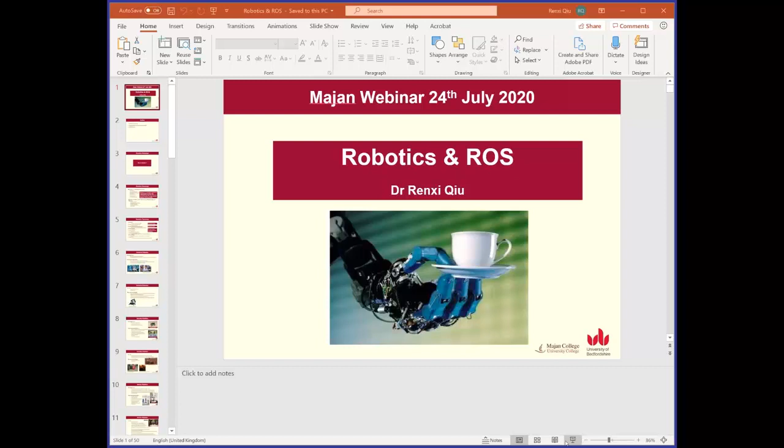Okay, thank you very much. It's my pleasure to make this presentation on robotics for the webinar in Majan. My name is Renxi, I come from University of Bedfordshire, UK. Today I'm going to talk about the topic of robotics.

I will cover 3 topics in this talk. I will start with robotics nowadays, then briefly talk about building robotic applications with the robot operating system called ROS, and finally I will go through a project we had before, building robot assistants using ROS. So that's the outline for our talk today.

Starting with robotics nowadays: the word 'robotics' initially came from Asimov's science fiction book called Liar. In that book, a robot tries to please his owner by lying to people. At the same time, the robot has difficulties maintaining consistency in his own knowledge because he's lying all the time. Eventually, the robot malfunctions. So that's the first time the term 'robotics' was used in history.

To define what robotics is and to cover the concept of robotics nowadays is not very easy, because robotics is a multidisciplinary field. It comes from mechanics, physics, automation, electronics, computer science, cybernetics, and AI. We use concepts resulting from all these fields, but we are different from them. We are trying to unify two different cultures, namely engineering and science. By combining these two cultures together, we are trying to explore things like autonomy, learning, consciousness, free will, decision-making, freedom, emotion, and many other things.

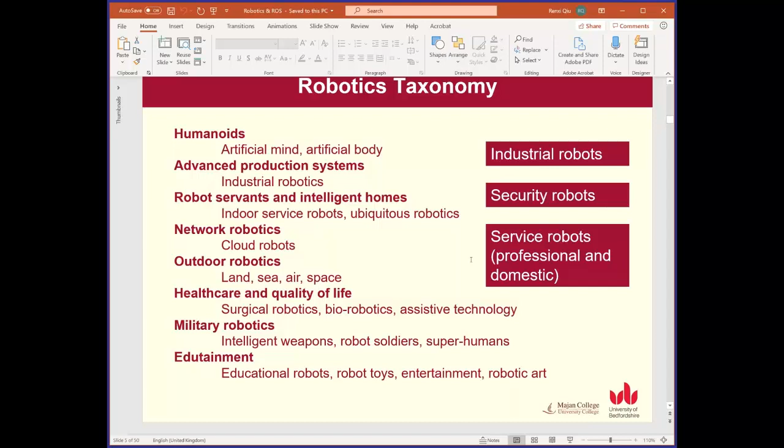Among so many different applications of robotics, I will pick 3 key applications: industry robots, security robots, and service robots. With these 3 kinds of robot applications, we try to understand what problem we are actually solving, and what the difference is between robotics and, let's say, automation. I'll start with the first one, which is industry robotics.

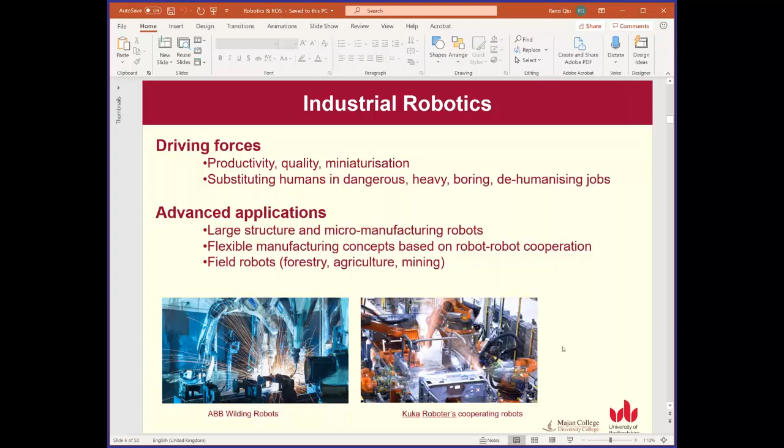The driving force of industry robotics is helping us make better production, replacing humans in dangerous, heavy, or boring environments. With industry robotics, you have many different applications. In the diagram here, you can see the ABB welding robots, which help make the panels. On the right-hand side, we have the KUKA robot arm, used in the car manufacturing plant. For most of these industry applications, you have your industry workspace, and the robot is there to perform difficult tasks which are not easy for humans.

For the issue we face with industry robotics, we need to do research on adaptation and configuration. Even though the environment is not changing a lot, we still need to adjust the robot to handle the task and optimize our applications.

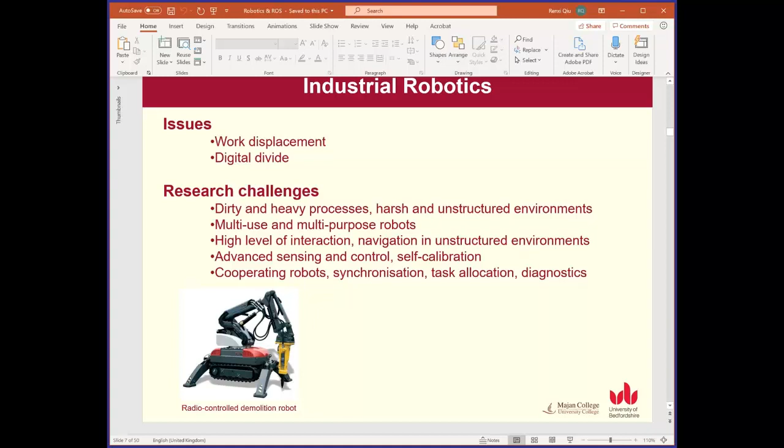Industry robotics are the most well-deployed robotic applications nowadays, and they're producing a lot of real-world applications for us. Moving on from the workspace of industry process, we move to the next one, which is security robotics.

For security robotics, we are mainly working in outdoor environments, so we don't have the luxury of predefined workspaces. You've got a lot of unstructured environment, you're not predicting all objects around the robot, and the robot needs to perceive and understand the environment.

On the right-hand side, you can see this is a Summit robot. We use them for remote assistance and civilian purposes. On the bottom right side, you have the robot called Spot, from Boston Dynamics. In Singapore, they use this robot to deploy in the park — if someone is not wearing his face mask, the robot will give notification directly to the human.

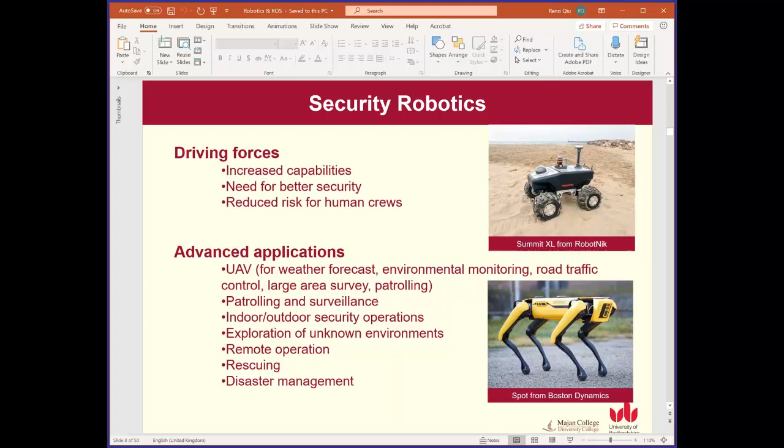In these slides, we see that for security robots, the main challenge we are facing is situation awareness. This is understandable because we are working in a more challenging environment — we cannot fully define the environment like the industry robot.

So that's the second category of robots I wanted to show you. The third category of robot I want to show you is service robots. We're moving from outdoor to indoor — the robot is working with humans in the indoor environment, helping us improve our quality of life.

Compared to rescue robots working outdoors, it's actually getting even more challenging now because the indoor environment is not only unstructured but also has lots of dynamics. You have to work with safety — you must not damage anything in the environment, and you need to ensure the robot is able to keep the surrounding environment safe, not to hurt humans.

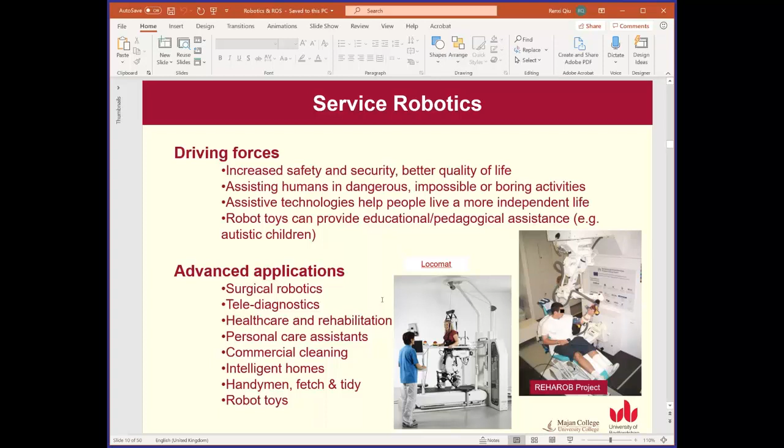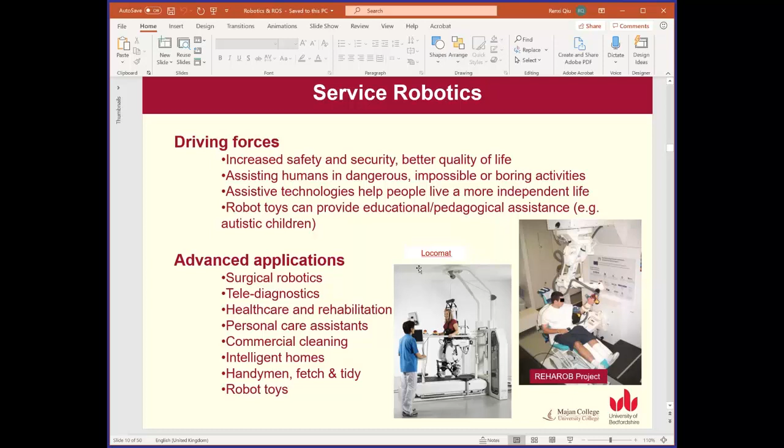The main issue, as I mentioned, is about autonomy and safety. Robots need to be clever enough to handle different kinds of situations, plan for themselves, and maintain consistent performance in unpredicted environments. So that's three kinds of robotic systems we normally face in real life.

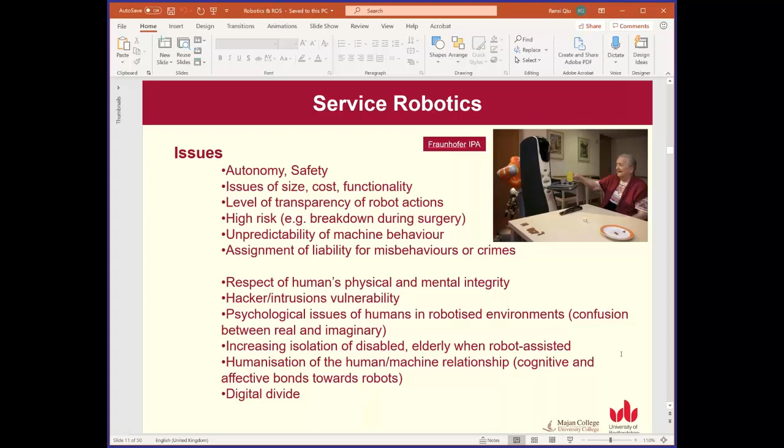For service robotics, there are many different kinds of challenges. We need to deal with complexity and improve machine learning to handle unexpected situations, and optimize the sensors, especially in unexpected situations.

Coming back to my question: what is robotics? Compared to automation, what is different? You can see from the line of examples we've presented so far that robotics is about handling unexpected situations. We're trying to build intelligent machines that make their own decisions in different kinds of unstructured and dynamic environments, from industry processes to rescue outdoor environments to indoor environments with humans.

More and more challenges will be faced by robotics. It requires different disciplines to work together, from computer science to engineering, even from psychology to human science, to deliver optimized solutions with human beings.

To build robotic applications, we have something called ROS. ROS stands for Robot Operating System. This is a universally accepted programming environment for developing robotic applications.

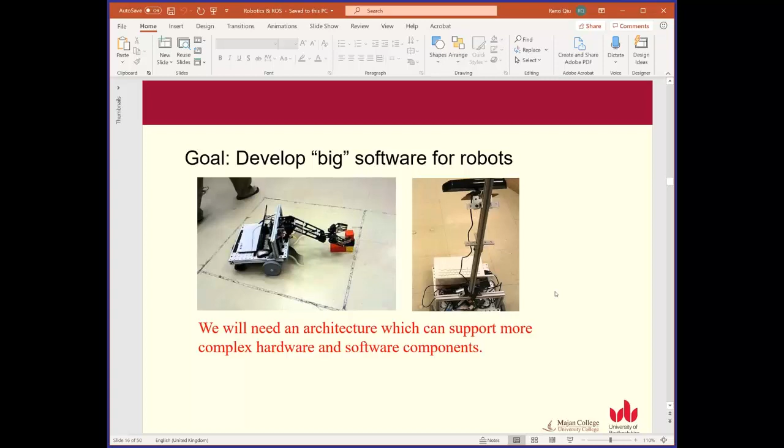So this is my applications in the lab. What we want to do is have some kind of big software which can, using very simple platforms, test our application scenarios and then redeploy them into complicated hardware on a real robot. We want some kind of architecture to support building this kind of complicated hardware from simple platforms.

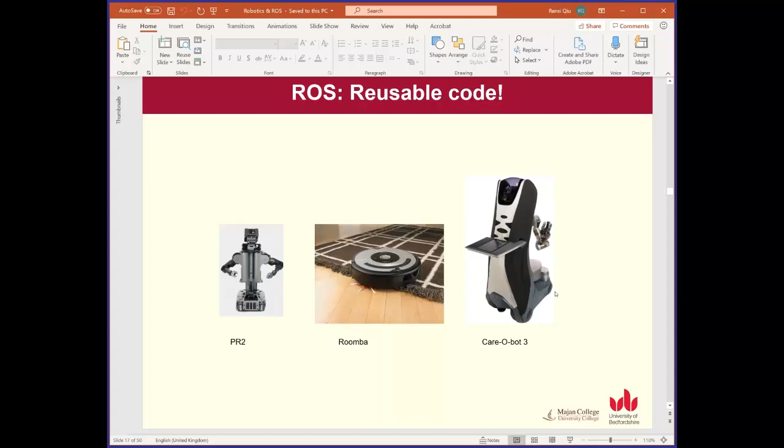For ROS, the objective is the same as software engineering: it's about reusable code. For a simple platform we develop early on, we can redeploy it into different kinds of robots, whether it's a Care-O-bot, a small Roomba, or a PR2. They share similar kinds of architectures, similar kinds of controllers, and similar kinds of software logic that we can implement in our laboratory first.

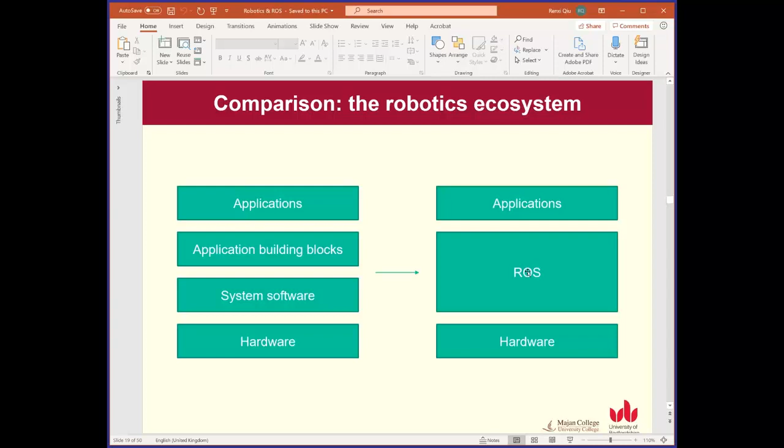The same approach will be applied to the robotic ecosystem. What we do is integrate the application building blocks and system software together into ROS, and then we have the hardware and our applications glued together with the robot operating system.

It's kind of like a meta operating system. ROS is open source. It runs mainly on Linux, especially Ubuntu. It can run on Windows, but that's not optimized yet. It is agent-based, with distributed message passing, just like a normal distributed system. We support publish-subscribe, and we have different kinds of services using remote method invocation. Finally, different programming languages are supported for robot development using ROS. Whether you're a C++ person, you like Python, or you prefer Java, they will all be integrated together into robot development.

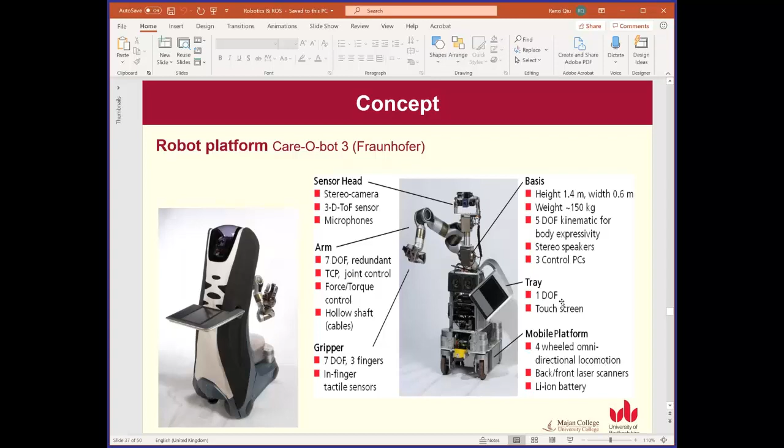We have different scenarios designed for the robot, including fetch and carry, emergency assistance, and retrieving difficult objects for elderly people if they are too high, too low, or too heavy. The robot will be used by family members, elderly people, and professional tele-assistants.

Finally, we have a professional teleoperator interface. This is for professional carers to control the robot and help the user. What we did in this project is design a high-level control framework based on ROS.

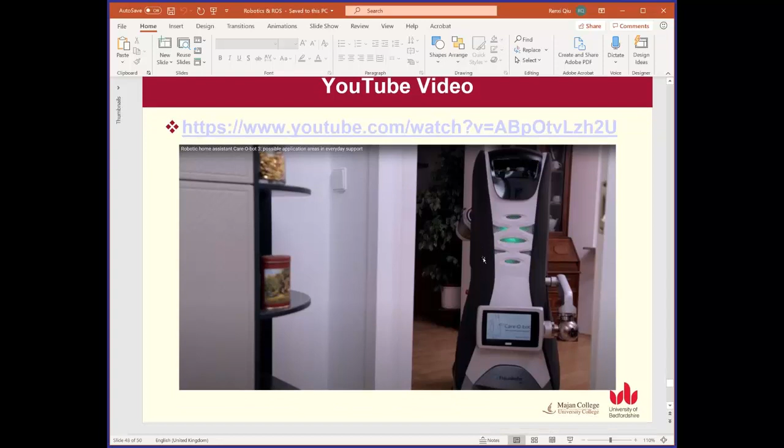Overall today, very quickly, I went through some significant ideas: what is robotics nowadays, what is our approach to building robotic applications with the framework called ROS, and finally how do we do that in a software called SRS. So my presentation is now complete and it's ready for you. You can send your questions to us and we will try to answer you later on.